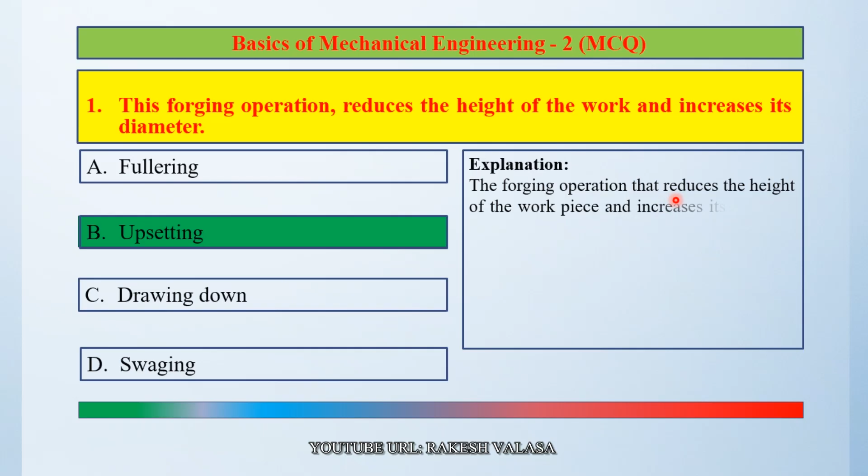Let us see the explanation. The forging operation that reduces the height of the workpiece and increases its diameter is called upsetting or upset forging. This process typically involves placing the workpiece between two flat dies and applying compressive force, causing the workpiece to decrease in height while its diameter increases. So the correct option is option B, upsetting.

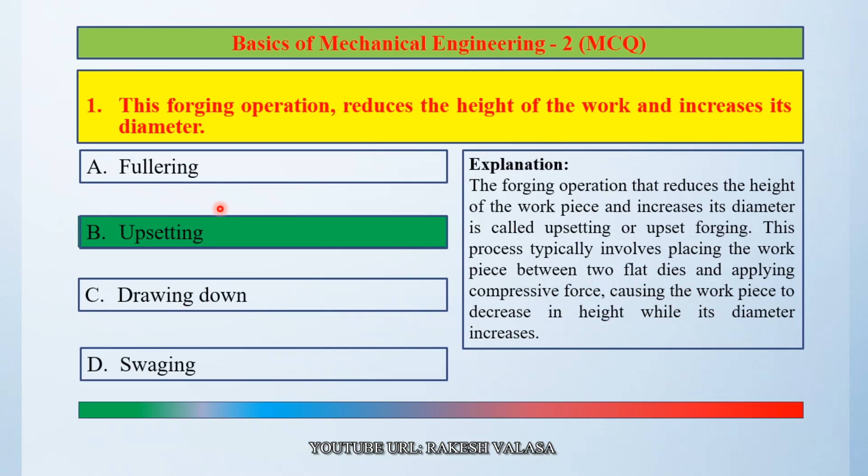Question number 2. Earring is associated with option A, deep drawing. Option B, extrusion. Option C, rolling. Option D, forging. The correct answer is option A, deep drawing. Let us see the explanation.

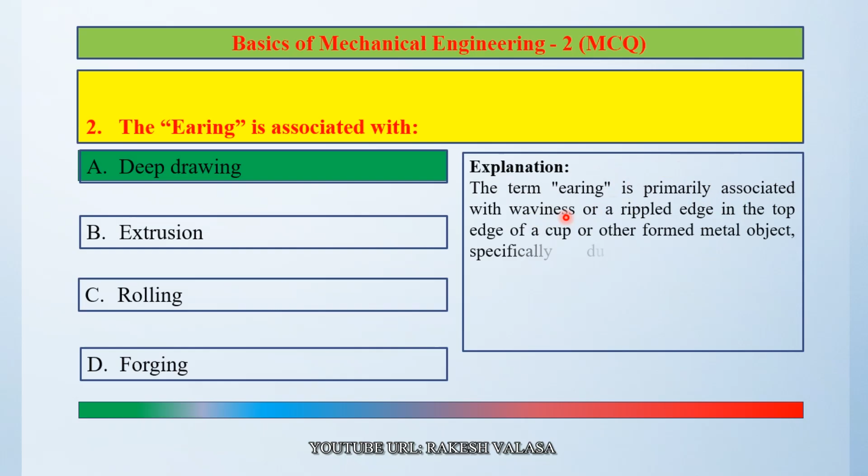The term earring is primarily associated with waviness or a rippled edge in the top edge of a cup or other formed metal object, specifically during deep drawing processes. It is a common defect in sheet metal forming, particularly in the drawing of cups, caused by anisotropy of sheet metal. So the correct answer is option A, deep drawing.

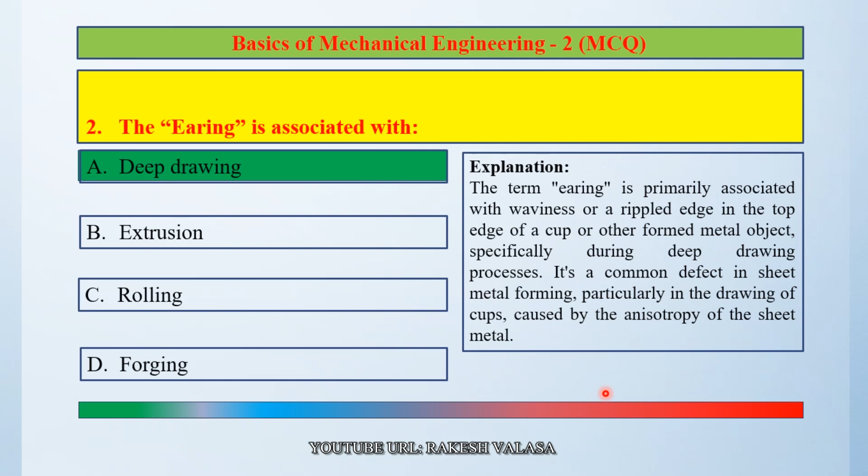Question number 3. When a metal sheet with a circular hole is heated, the hole blank. Option A, gets larger. Option B, gets smaller. Option C, remains the same. Option D, gets deformed. The correct answer is option A, gets larger. Let us see the explanation.

When a metal sheet with a circular hole is heated, the hole gets larger. This is because the metal, including the area of the hole, expands when heated, causing the hole's dimensions to increase as well. So the correct answer is option A, gets larger.

Question number 4. In die operation, punching a number of holes in a sheet is called option A, parting. Option B, perforating. Option C, notching. Option D, lancing. The correct answer is option B, perforating. Let us see the explanation.

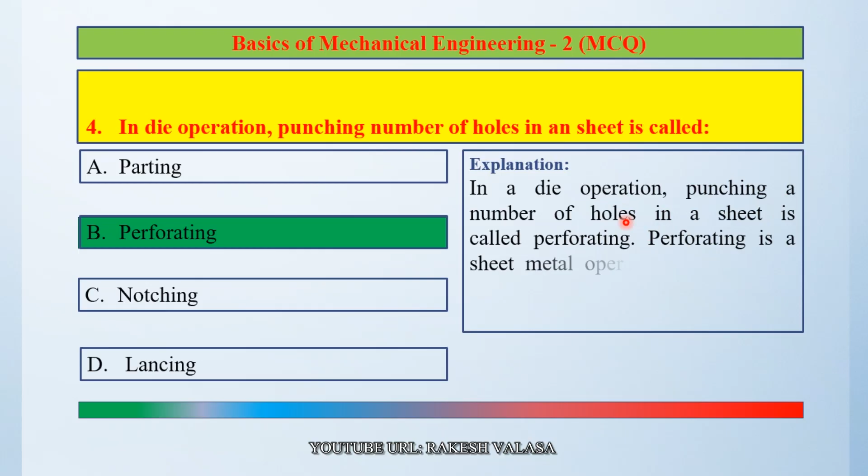In a die operation, punching a number of holes in a sheet is called perforating. Perforating is a sheet metal operation that involves punching a series of uniformly spaced holes into a sheet material. So the correct answer is option B, perforating.

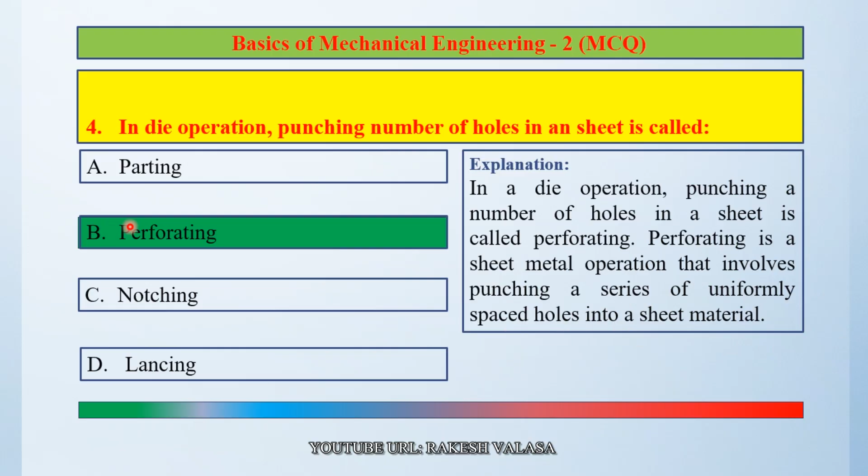Question number 5. The shear angle is mostly provided on blank in the blanking operation. Option A, punch. Option B, die. Option C, both punch and die. Option D, none of these. The correct answer is option B, die. Let us see the explanation.

The working faces of the punch or die are ground off so that they do not remain parallel to the horizontal plane but are inclined to it. This angle of inclination is called shear. The provision of shear distorts the material being cut. When shear is on the face of the punch, the blank cannot be flat, and when shear is on the die, the piercing cannot be flat.

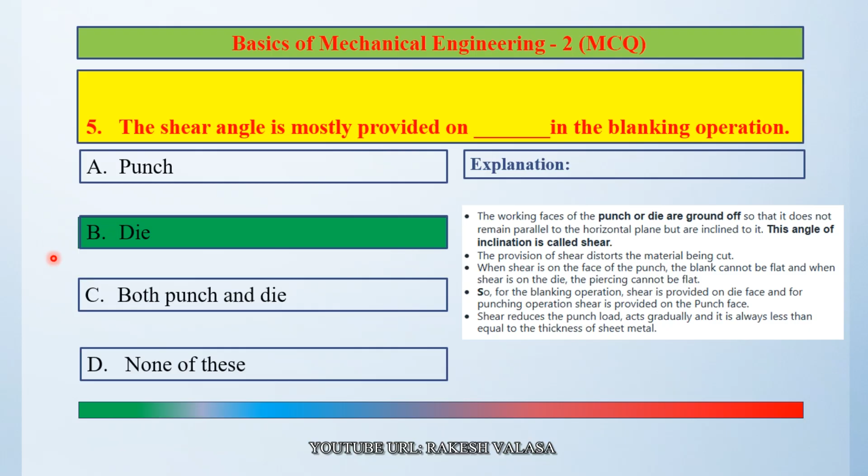So, for the blanking operation, shear is provided on the die face, and for the punching operation, shear is provided on the punch face. Shear reduces the punch load, acts gradually, and it is always less than or equal to the thickness of the metal. So the correct option is option B, die.

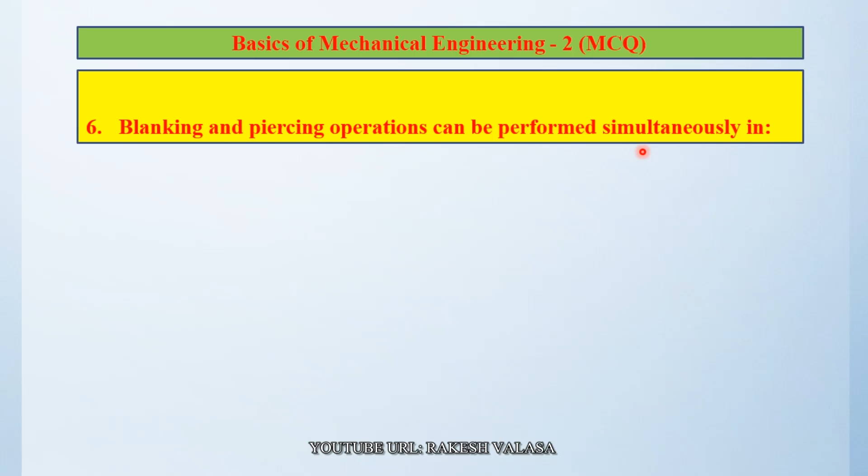Question number 6. Blanking and piercing operations can be performed simultaneously in option A, combination die, option B, simple die, option C, progressive die, option D, compound die. The correct answer is option D, compound die. Let us see the explanation.

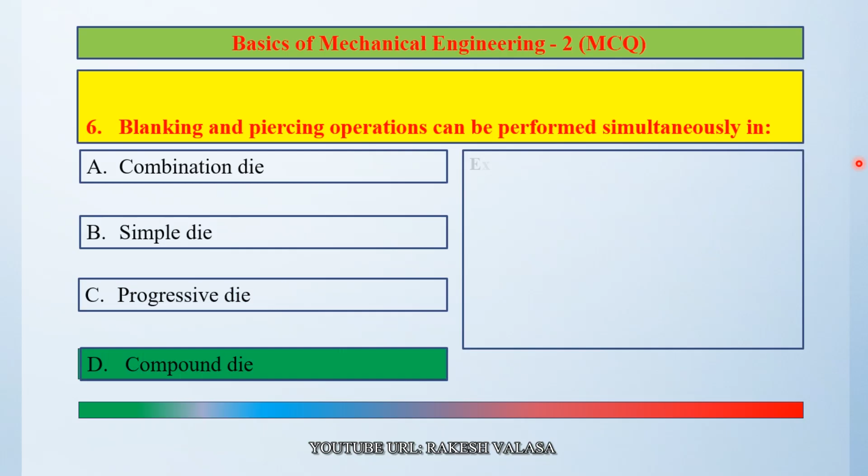Blanking and piercing operations are common sheet metal forming processes used to create holes or remove specific shapes from a metal sheet. These operations can be performed simultaneously in a compound die. A compound die is a type of die that combines multiple operations into a single die set. So the correct answer is option D, compound die.

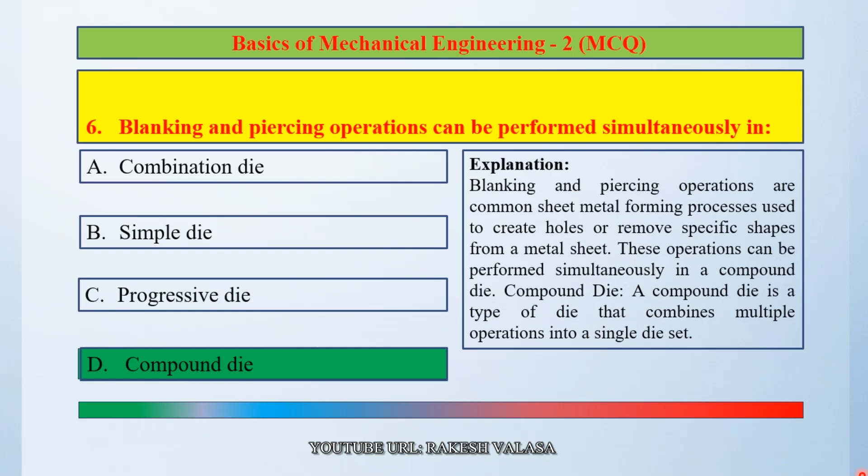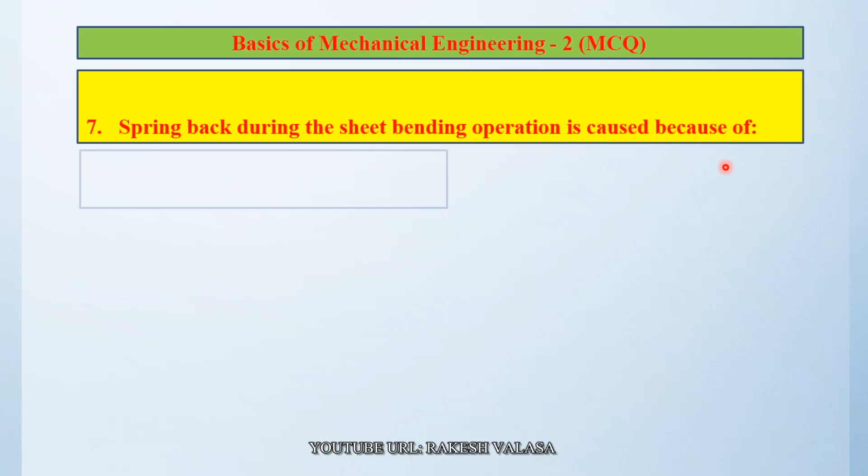Question number 7. Spring back during the sheet bending operation is caused because of option A, release of stored energy during elastic and plastic deformation. Option B, release of stored energy during plastic deformation. Option C, release of stored energy during elastic deformation. Option D, excess energy that was utilized during the forming process. The correct answer is option C, release of stored energy during elastic deformation. Let us see the explanation.

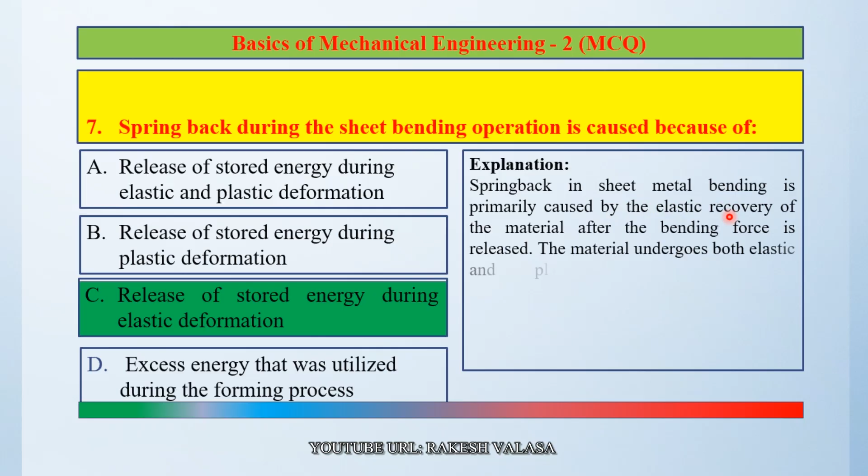Spring back in sheet metal bending is primarily caused by the elastic recovery of the material after the bending force is released. The material undergoes both elastic and plastic deformation during bending. When the bending force is removed, the material tends to return to its original shape, a phenomenon known as spring back. So the correct answer is option C, release of stored energy during elastic deformation.

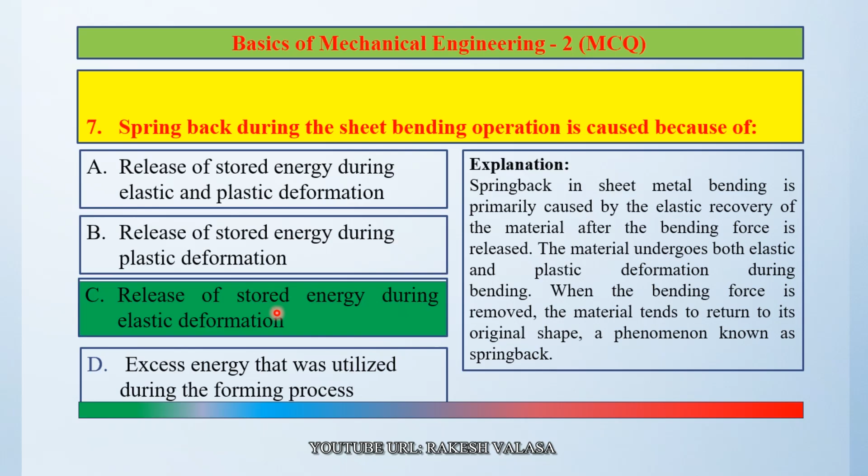Question number 8. Removing pieces from the edge in shearing operation is known as option A, coining, option B, notching, option C, grooving, option D, lancing. The correct answer is option B, notching. Let us see the explanation.

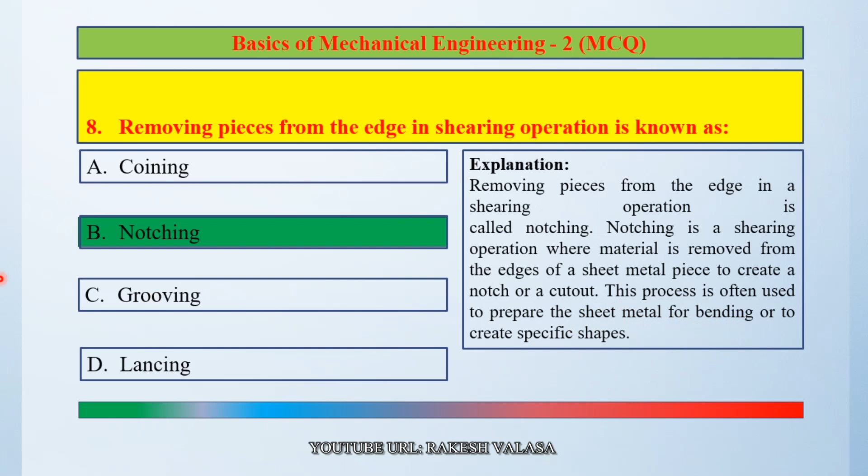Removing pieces from the edge in a shearing operation is called notching. Notching is a shearing operation where material is removed from the edge of a sheet metal piece to create a notch or a cutout. This process is often used to prepare the sheet metal for bending or to create specific shapes. So the correct answer is option B, notching.

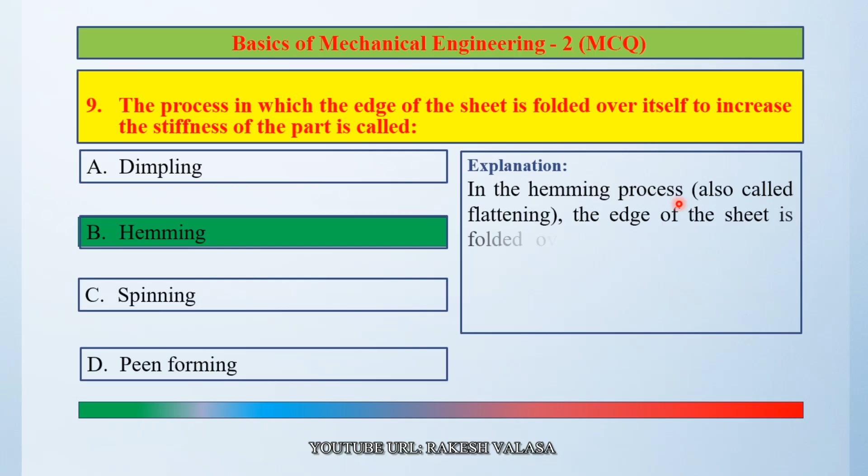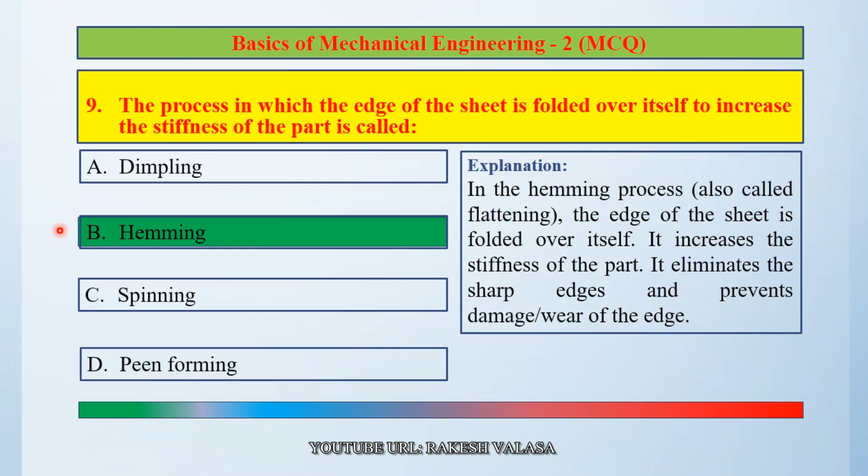The hemming process is also called flattening. The edge of the sheet is folded over itself. It increases the stiffness of the part. It eliminates sharp edges and prevents damage or wear of the edge. So the correct answer is option B, hemming.

Question number 10. Which of the following parameters should be low to get the best result in a sheet metal formed part? Option A, thickness or surface area. Option B, surface area or thickness. Option C, length or width. Option D, width or length. The correct answer is option A, thickness or surface area. Let us see the explanation.

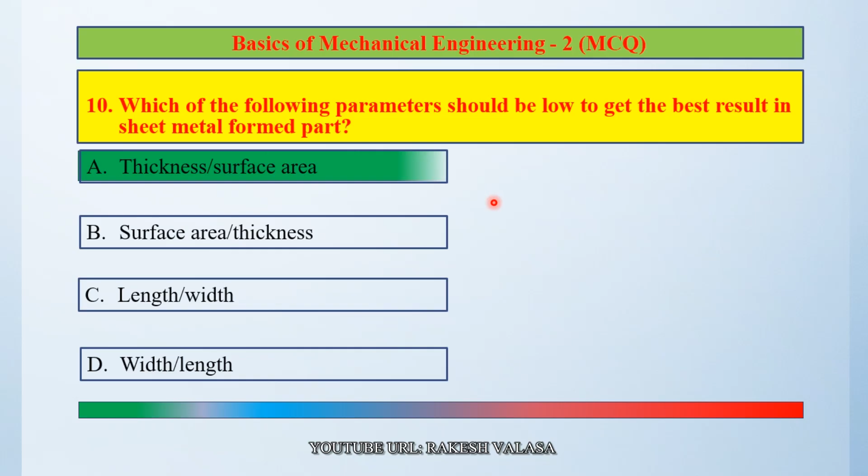For the best result in sheet metal forming, the sheet metal thickness should be low to achieve optimal formability and ease of shaping with minimal risk of cracking or wrinkling. A lower thickness also generally means a lower cost. So the correct answer is option A, thickness or surface area.

Okay, this is regarding the week 6 solutions in NPTEL, Basics of Mechanical Engineering 2. In the next video, we will be discussing the week 7 solutions in NPTEL of Basics of Mechanical Engineering 2.